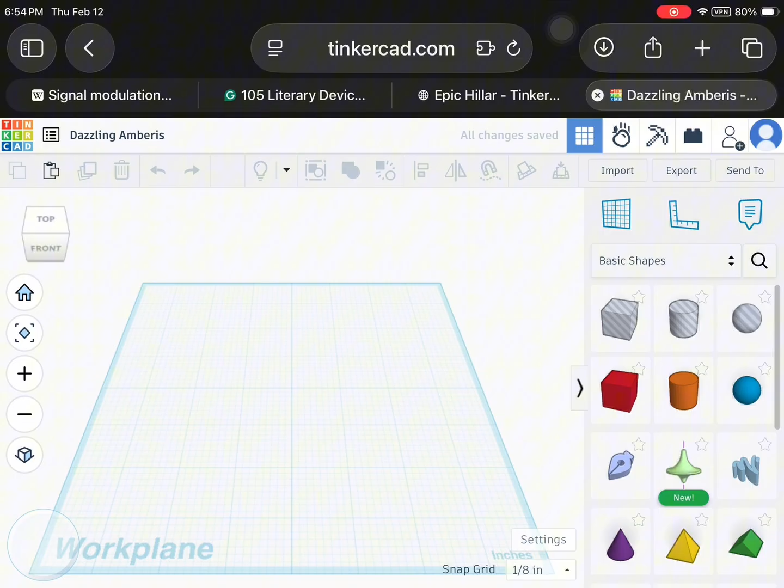This website is Tinkercad. They have a lot of different options for components, but today we're just going to be doing a 3D design for a 3D print model. So we're going to start off with a cylinder and put that in the middle.

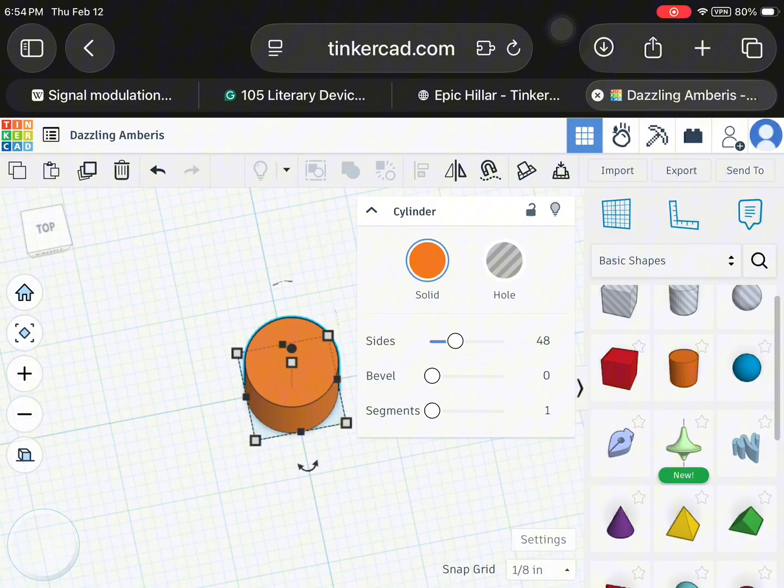Click on the top view in the upper left-hand corner. And that button on the bottom just makes it a little more accurate for designing purposes, but not as realistic. And if you click anywhere in that plane with all the boxes, you can change the view of the object.

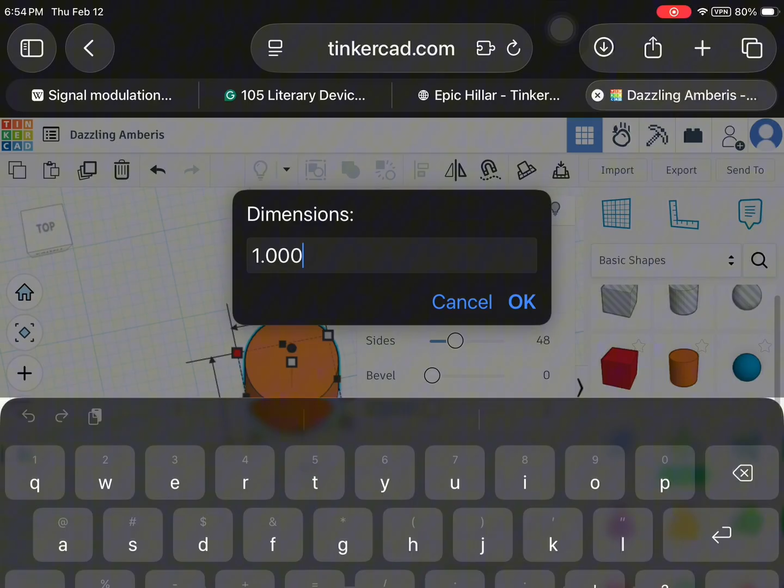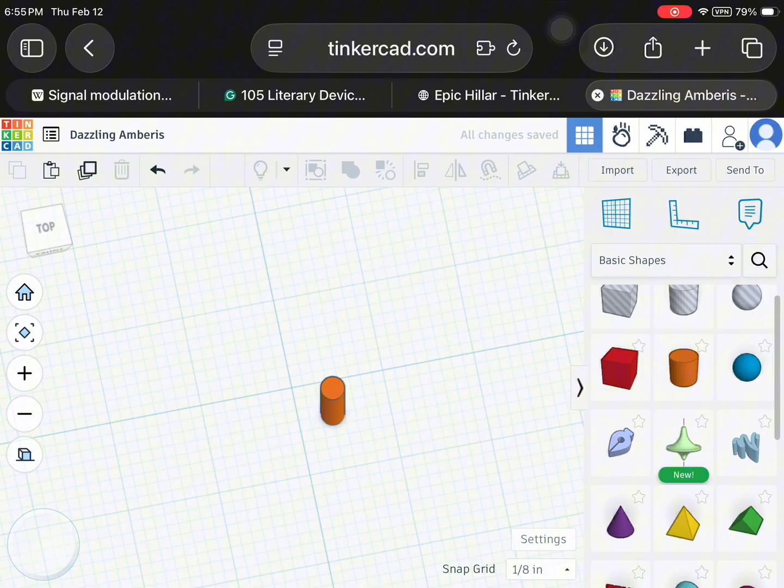So by clicking up top, we can resize it by entering it in. I'm going to put 0.25 inches because that is the diameter of the Permobil stem. If you pull up your joystick on a Permobil, there's that little metal thing that's under there, and that's 1/4 inch in diameter, and there's about an inch before that little protective shroud starts showing. So I'm going to make it a little bit larger than an inch. You'll see in a second.

Center it again on that middle of the work plane. And then I'm going to click the center button right there, which is going to put the object right in the middle, make it easier to design.

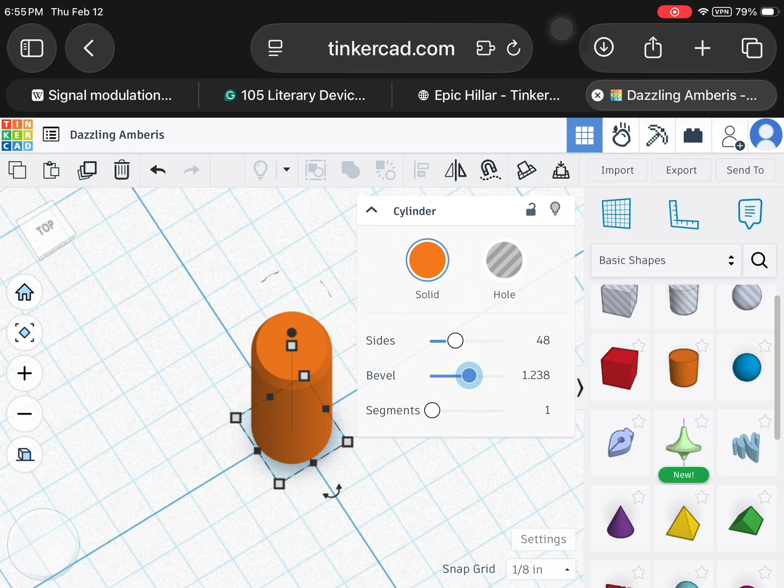So this bevel just kind of rounds out the edges. I'm going to put a little bit of a bevel. It'll make it easier to go on. The joystick will go on the stem easier. And there's a little bit of a bevel if you remove the joystick. Then I'm going to turn it to hole, which is going to deduct all of this at the end of our design.

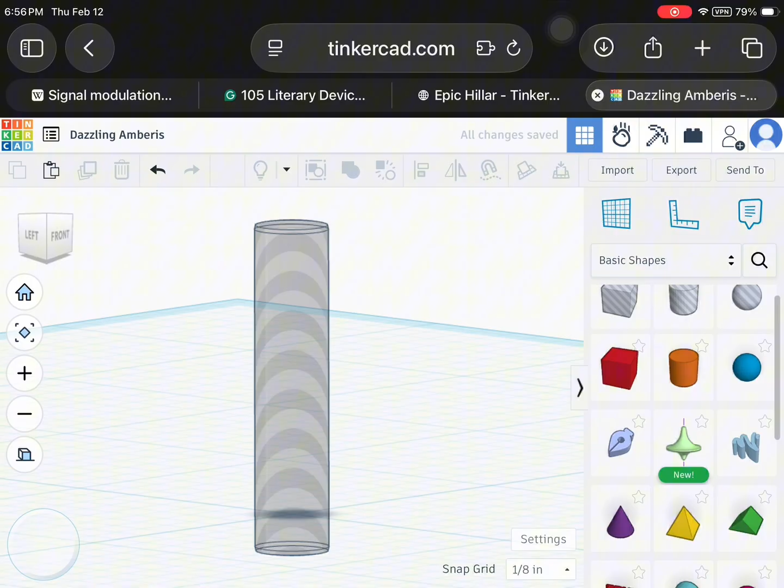I'm going to make that just a little bit longer. I think the snap is 1/8 of an inch at the bottom, so whenever I drag, it'll kind of click to that. So it's 1 1/8 inch long now. So if I put another cylinder right on top of it, you'll see it kind of places it on that other object. So what I like to do is put it next to the object and then drag it over, which you'll see in a second.

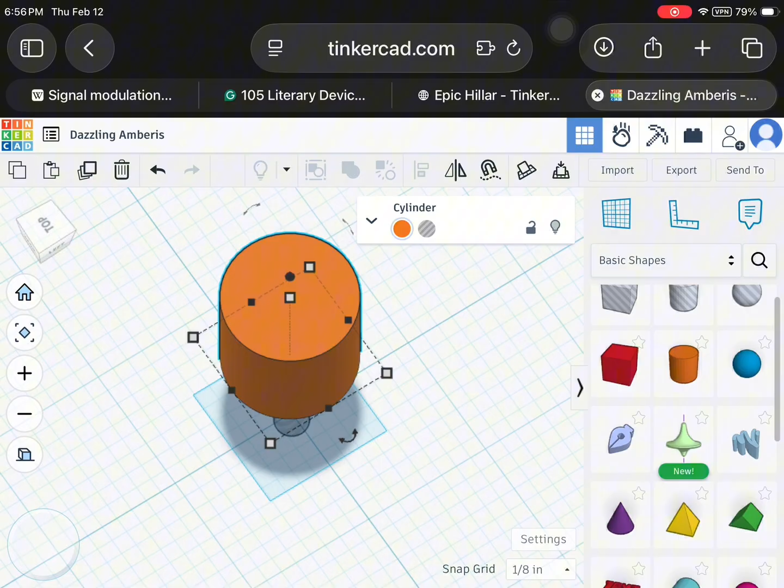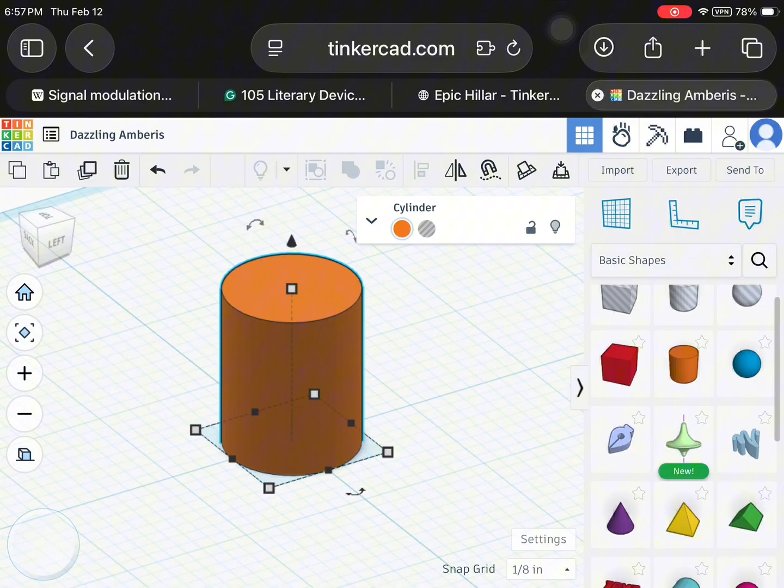There we go. And now that hole will be going out of the bottom a little bit more than the object, which is why I made it 1 1/8 inch. But this I'm going to make 1.25 inches, the actual material. The sides just make it smoother. You can't get a perfect circle with a 3D printer, but you can get it to the closest 0.4 millimeters, which is pretty darn close.

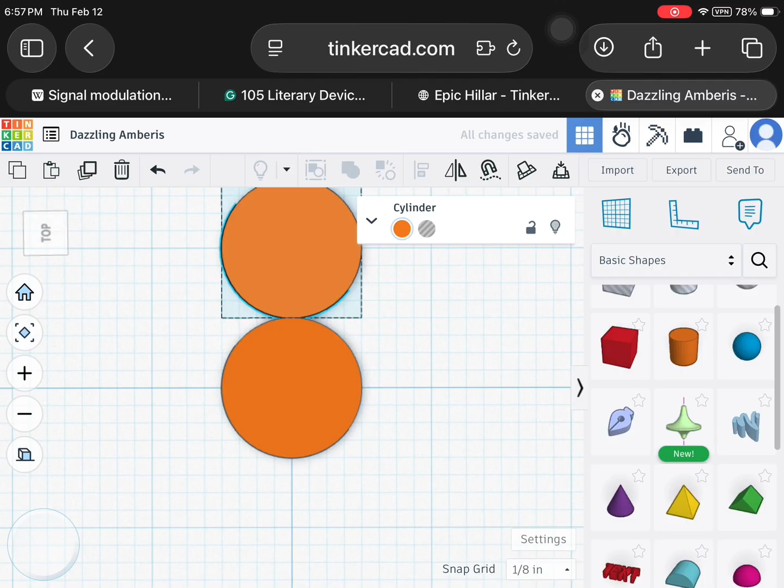Now I'm going to put an oval at the top. I'm going to make a circle and just grab those sides, those little black squares on the edge, and drag them. So this is 2 1/4 inch wide, I believe.

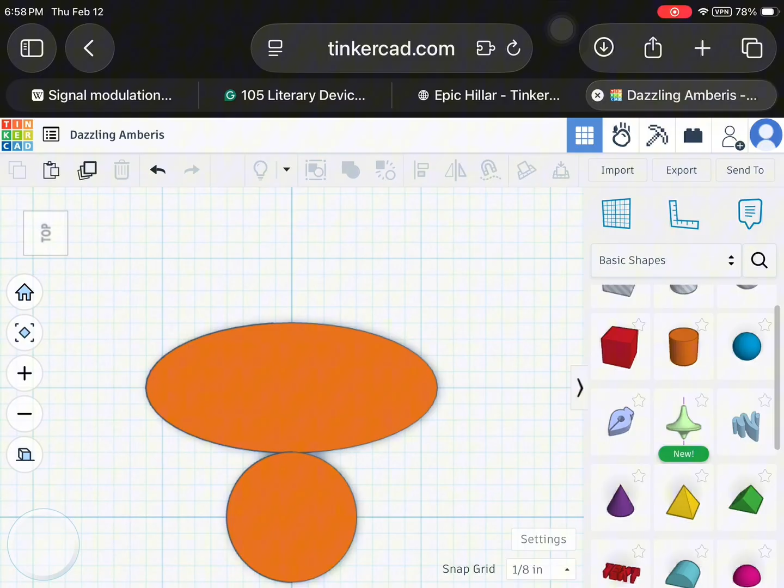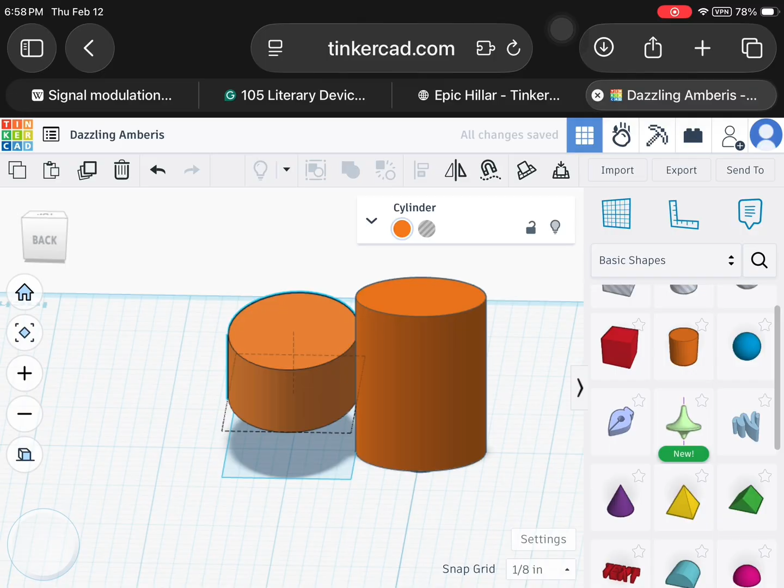The reason I'm making this joystick is it's not only cool and fun to do, but when I was backing out of my bathroom, my goalpost joystick that was on my Permobil was actually wider than the joystick module itself, which is about 3 inches wide. So it actually caught the cupboard in my bathroom and pinned my arm against the wall in my wheelchair, and I almost got stuck there. So this is actually pretty functional. I was in desperate need of a joystick that was not wider than the module, so that wouldn't happen again.

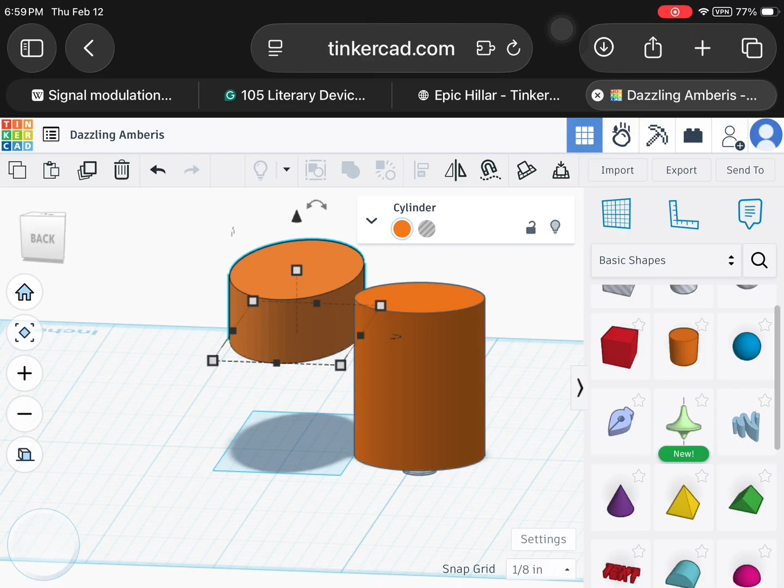So these two surfaces, when they were flush with each other, you'll notice when I put them on top of each other, there's a little bit of a line that forms when two materials become flush with each other. So I'm going to make it a little bit taller than the other cylinder, just so that doesn't happen. Sometimes it causes a problem with printing. Other times it doesn't really matter, but just to be on the safe side, I'm going to actually have that oval just a little bit taller than the cylinder that I first drew.

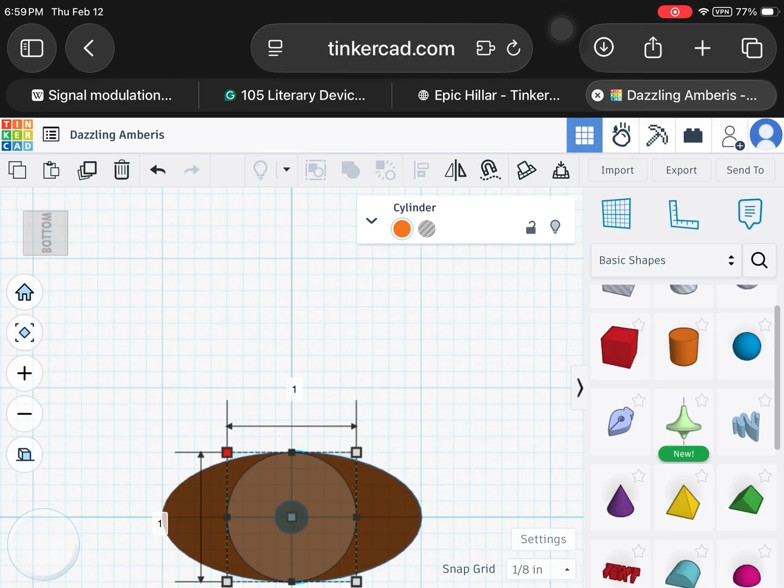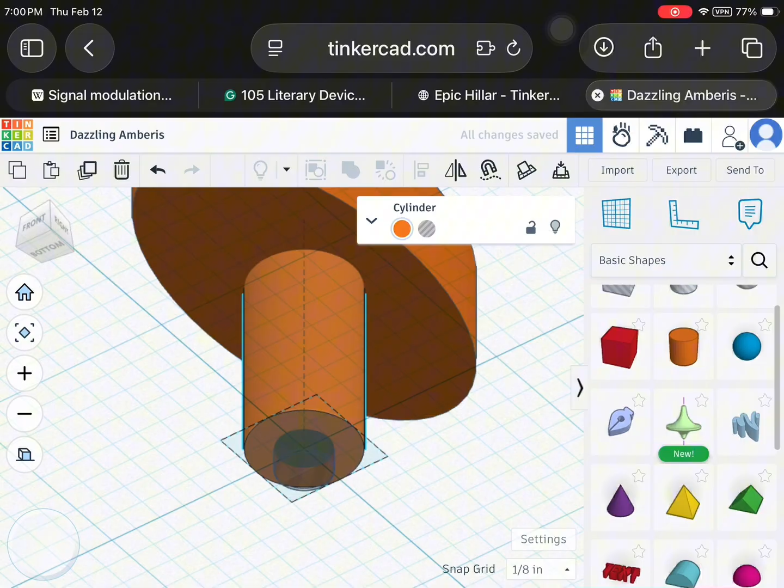And now that they're all centered with each other, I'm going to make that cylinder, that little stem, a little bit smaller. An inch is a little bit too big. I do want to be able to get my fingers around it, so I'm just going to make it 1/2 inch wide. So if the hole is 1/4 inch and the stem is 1/2 inch wide, then 1/4 inch of material should be pretty strong. If I break that, I think we have bigger problems, but should be okay.

So this is pretty much the basic design. There's obviously a lot of customization that you can do, but we're keeping it pretty simple just for an introduction to 3D modeling. Here you see those two surfaces kind of not perfectly forming into one another.

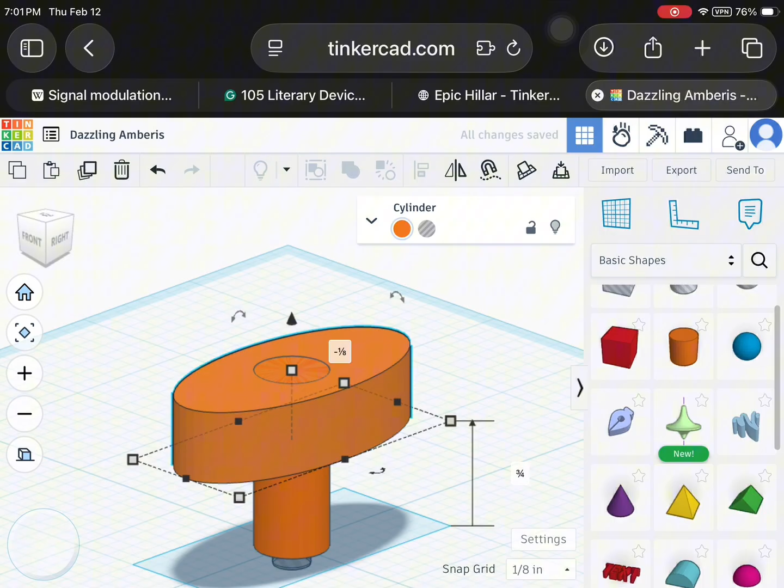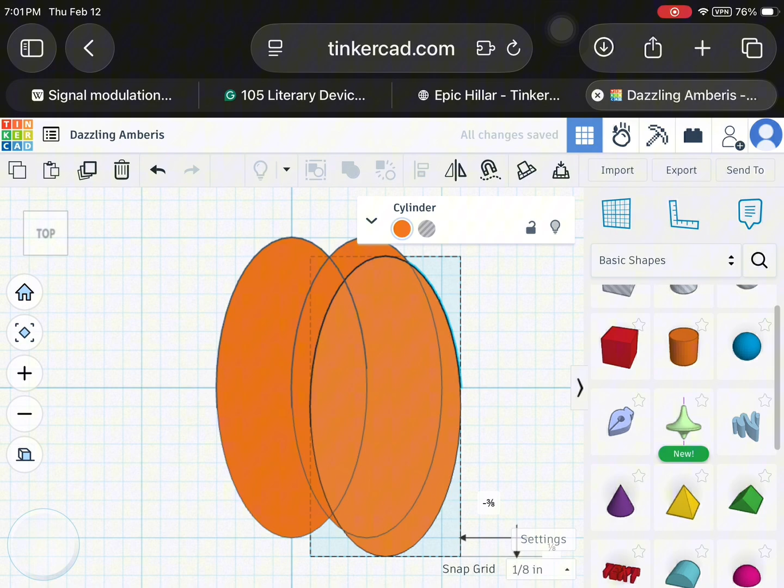So if you're making a design like this, you can add any sort of customization you want, obviously. But what I'm going to do is make 2 additional ovals on either side, and I'm going to turn them into holes to kind of create a groove that will hopefully keep my hand from slipping off if I'm maybe going around town or over some bumps. So I'm clicking on that hole button again in that drop-down menu.

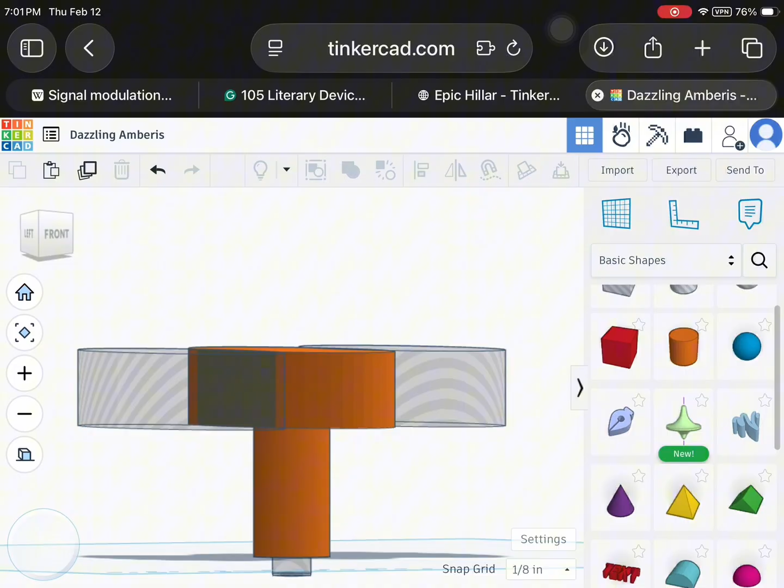And now all we have to do is combine all of these objects that we drew. So we're going to click each one. And for some reason, it's not letting me click that last hole that protrudes out the bottom of the plane. So we're just going to combine these 4 objects. Use that union button right there, which just means we're uniting them all. And then we're going to join those 2 other objects. And there we go.

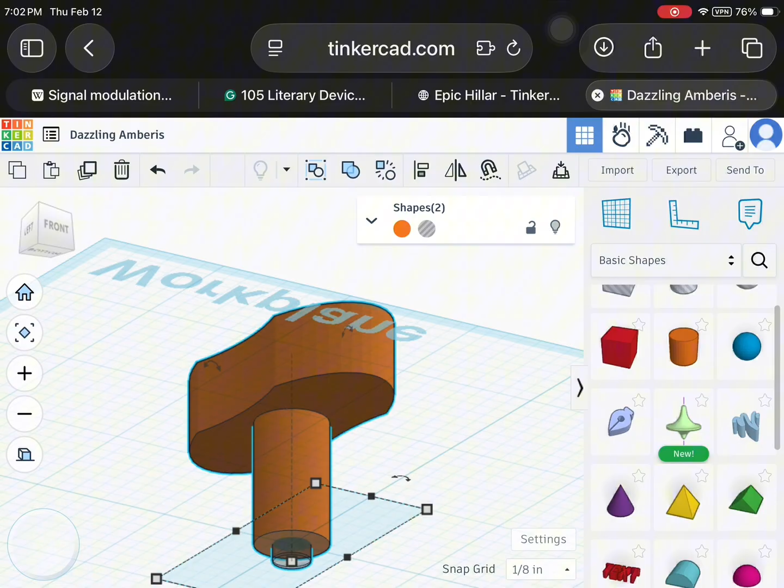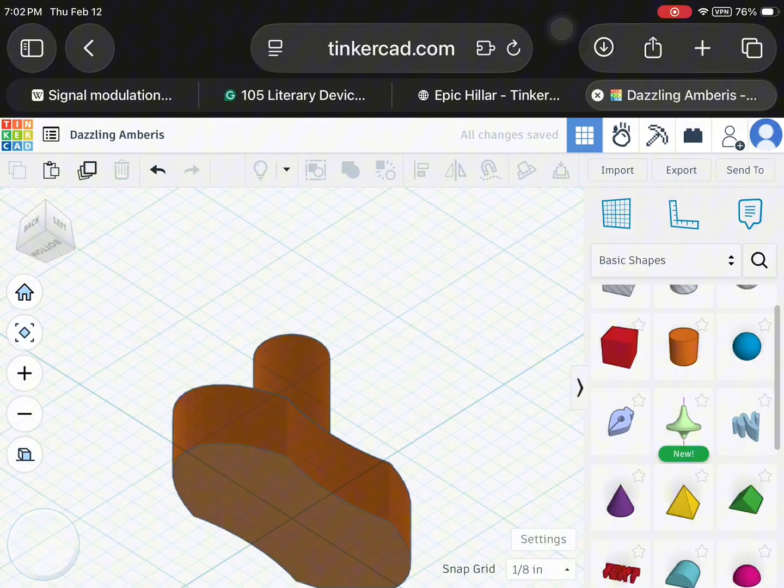Then the last thing to do is rotate it upside down. This is for printing. Generally speaking, 3D printers like to start wide and then print thinner as they go up. So I'm just going to put this whole thing upside down. If it was printing the other way, it would create these little filaments to support that large T handle. And then you'd have to cut them off, so it's easier just to put them upside down.

And it automatically generated some random name, so we're going to rename this Permobil U joystick. I think I originally put T handle, but it's kind of like a W or a U. You can call it whatever you want. Could have kept the automatic name generator if you wanted. I'm going to click over there to export, and an STL file is the most generic one. There's some that do others, but we're just going to save it as an STL file.

And on my iPad, everything pops up right here. I can sync it with my iCloud drive, and then I can access it from my PC. All of this Tinkercad I was doing on my iPad, but it's browser-based, so you just go to tinkercad.com, and you can access it from a PC or possibly your phone. And there it is. So you can just send these STL files around.

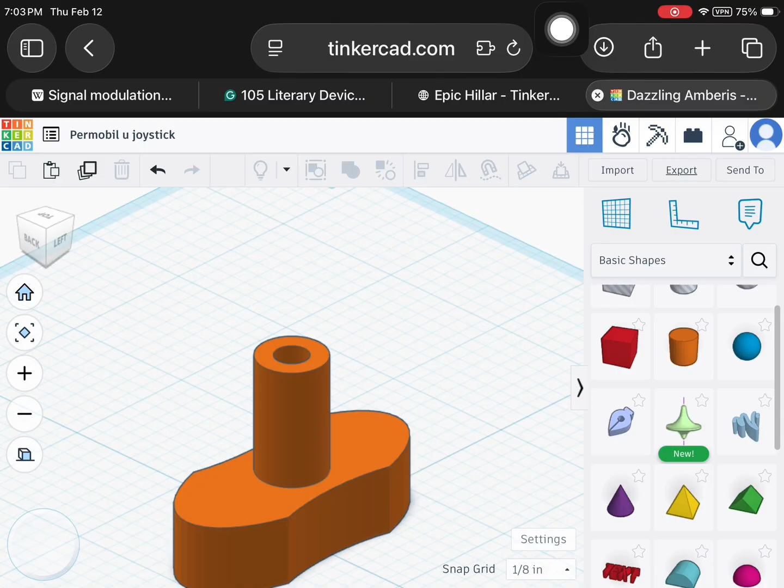There's 3D printing at the Richmond Public Library, as well as print farms around the states. There's some places that will actually print for free if it's an accessibility device, and I'll try to get some more resources on that for next time. But yeah, the STL file you can send off to pretty much any sort of 3D printer, and they'll print it out for you.